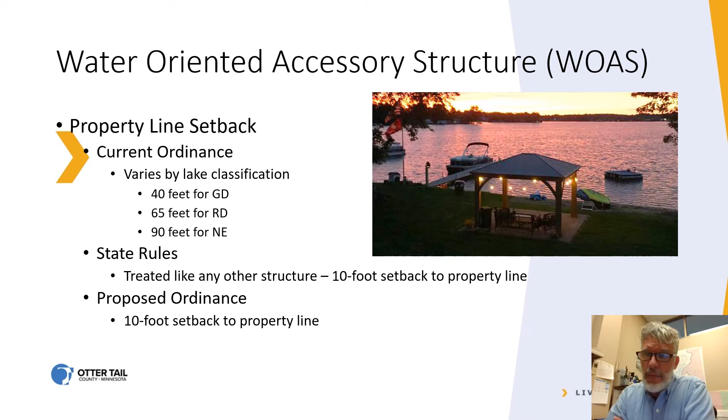The state rules treat this like any other structure, and the water-oriented accessory structure need only be 10 feet from the lot line. In an effort to come in line with the state standards, we are proposing to change the standard to the state standard of 10 feet. What this is going to do is allow a lot of lots in Otter Tail County that cannot currently have a water-oriented accessory structure, because they can't meet that large lot line setback, to have a water-oriented accessory structure. So again, looking at this graph, currently this standard is more restrictive than the state code, and we're bringing it down to meet state standards.

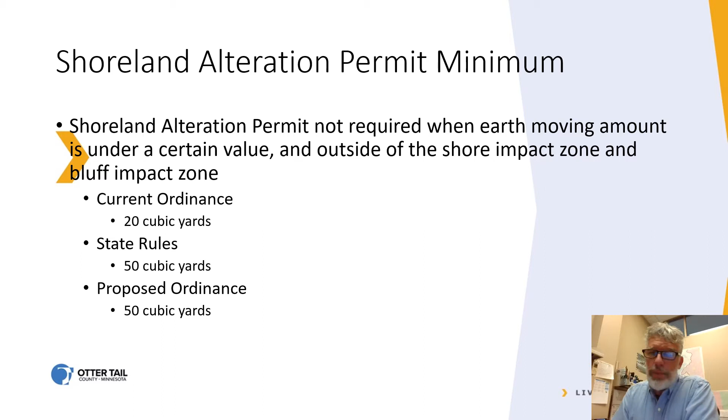Shoreland alteration permits. This is if you do any kind of landscaping or any earth moving in the shoreland district. Currently, we require a shoreland alteration permit if the earth moving that is being done is over 20 cubic yards. The state standard is 50 cubic yards. So again, in an effort to be more in line with the state standards, we're proposing to change this standard to the state minimum of 50 cubic yards.

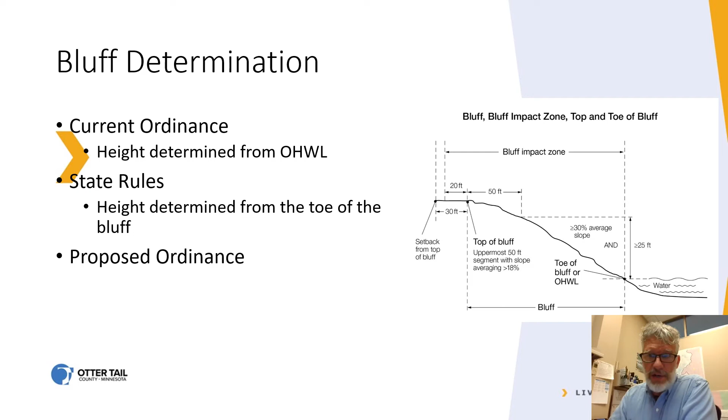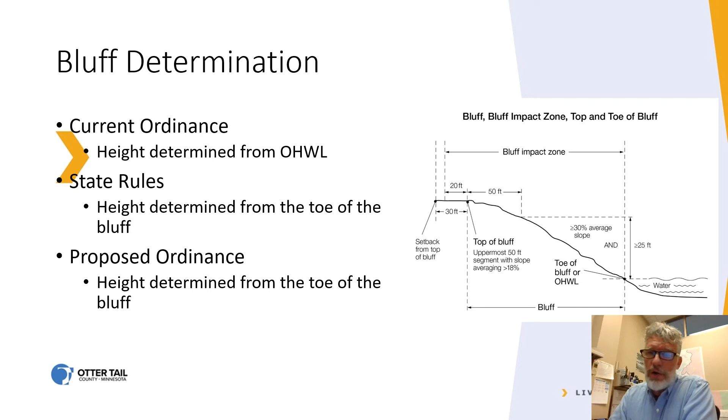Bluff determination. There's two ways you can determine a bluff. We determine the height of a bluff from the ordinary high water level, where the state determines it from the toe of the bluff. Now, most of the time, those two are the same thing, but sometimes there's a great distance between the water and the toe of the bluff, and it could create some situations that make something a bluff in Otter Tail County that the state does not consider a bluff. So we are going to be adopting the state standard of bluff determination. This, again, is an effort to be consistent with our neighboring counties.

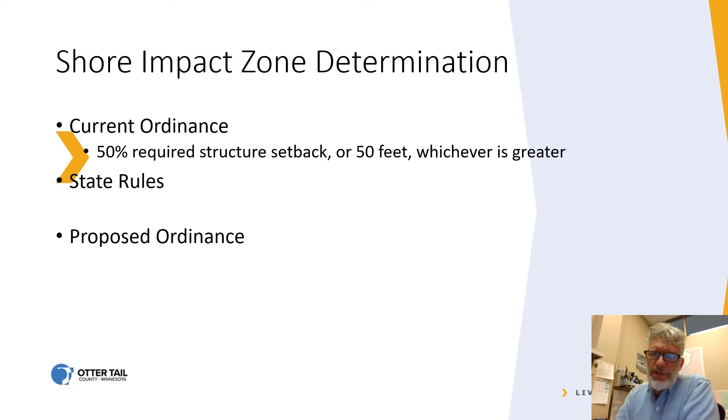Shore impact zone determination. Currently, we define the shore impact zone as 50% of the required structure setback, or 50 feet, whichever is greater. So for a recreational development lake, the structure setback is 100 feet. 50% of that is 50 feet. For a natural environment lake, the structure setback is 200 feet. So the shore impact zone is that first 100 feet from the shore. The state rules just say it's 50%. We have 50% or 50 feet, whichever is greater.

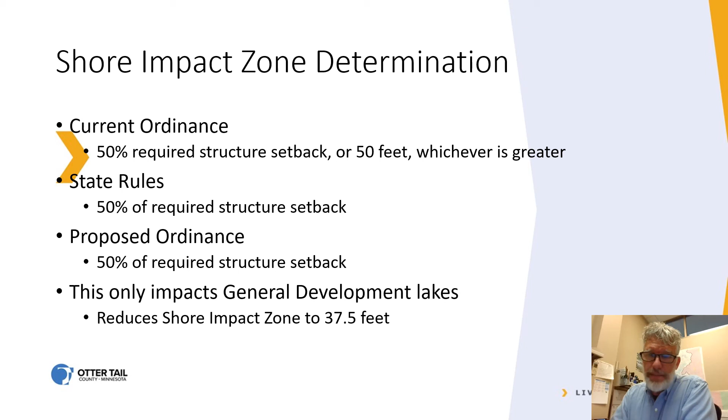We are going to be adopting the state standard. This is only going to impact general development lakes. Again, currently, on a lake like Otter Tail Lake or West Battle Lake, the shore impact zone is the first 50 feet. Now, with adopting the state standard, it's only going to be the first 37.5 feet, since the required structure setback on a general development lake is 75 feet. This is reducing the standard to meet state minimum.

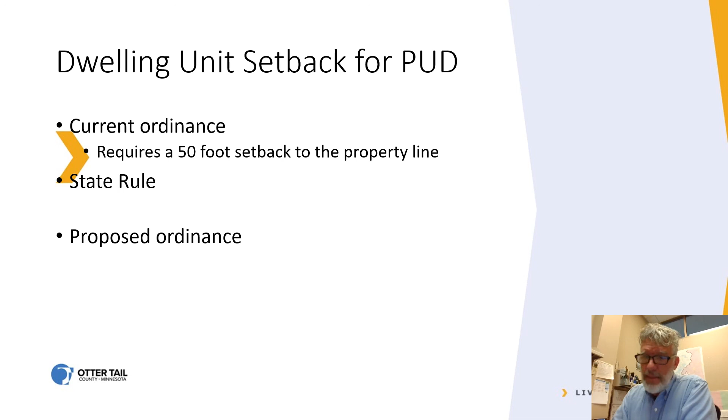Dwelling unit setback for planned unit developments. This is for resorts or campgrounds. Currently, we require a cabin or a camper in a commercial planned unit development to meet a 50-foot setback to the property line. The state only requires a 10-foot setback. We are again adopting the minimum state code and proposing to drop this standard down to 10 feet.

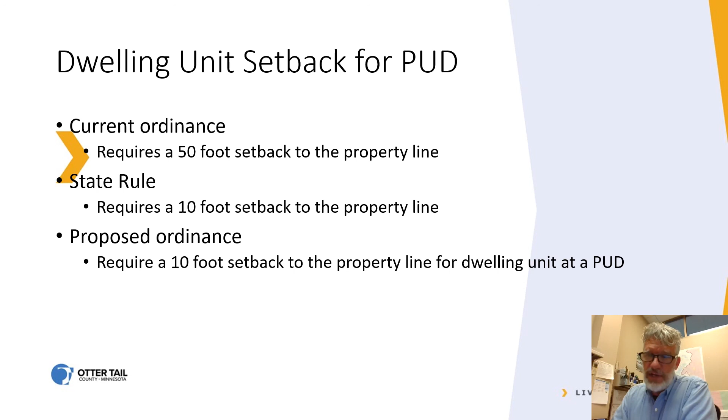In the next video, we'll be talking about controlled access lots, guest cottages, random changes we've made to the ordinance, and some changes to variances.